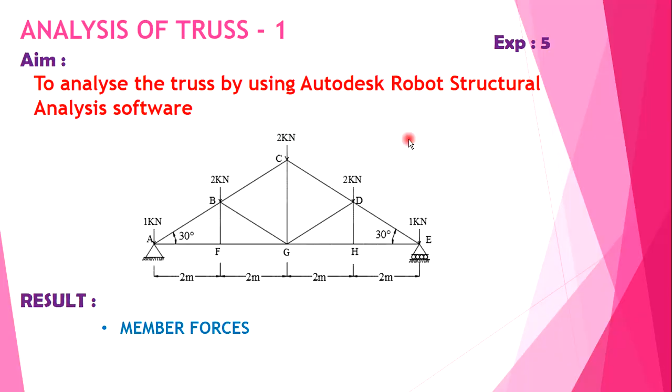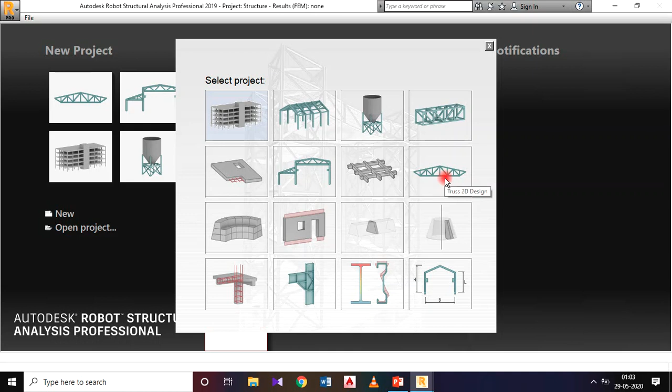We are on the front page of our software. To create a new project, click on New. In this window, previously we discussed the continuous beam and frame, and selected frame 2D design, but now we are going to discuss the truss. For that, select this truss 2D design. Click on this figure.

We got the main page. It is loading. Yeah, we got the page.

Now just verify the units. Go to tools, units and formats. Here the dimension is in meters, section dimension mm, forces kilonewton and moment in kilonewton meter.

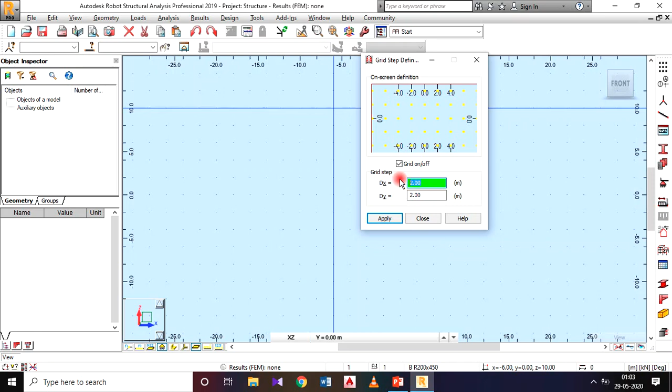Press OK. Then I need to set the ruler for that view - grid, then grid step definition. So I can set it for 1 meter and 1 meter interval. Apply and close, then zoom it.

Then go to view, grid, and turn off these dots. It is not required.

Now I need to define the axis. For that, geometry, axis definition. First we need to see the figure, the truss.

Observe here, in this truss the x values are given as 0, 2, 2, 2 meter and 2 meter. Is it right? But along the z axis it is 0. I need to find this distance, that is FB. I need a reference line here, and also a reference line at this point, that is GC. So 0, and this level, and this level. For that, I need to consider the right angle triangle of this one.

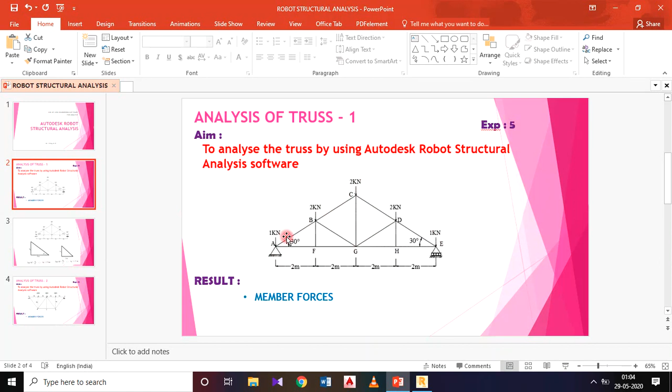I will show this in the next figure slide. I'm sorry, here I need to find this height. So I will take this triangle CGE, and I name CG as H1. The length given is 4 meter and the angle is 30 degrees. This is the bigger right angle triangle. So in this right angle triangle, I have the 30 degrees, and I need to find H1.

So I will apply tan 30 degrees. Tan 30 degrees equals opposite by adjacent. Opposite is H1 and adjacent is 4 meter. I got H1 as 2.31 meter after calculation.

Same thing, I need to find this level also. For this, I will take the smaller triangle DHE. So I have taken H2. H2 is nothing but HD and FB, both are the same, the same level only. So same angle, the 30 degrees. If I consider that, I got H2 as 1.15. So 2.31 and 1.15 - these are the two values. Now I will move on to that screen.

In the X value, it is 0, add, then 2, add, then plus 2 means 4, add, then 6, add, then 8, add. See here: 0, 2, 4, 6, 8. So then 0, 2, 4, 6, 8.

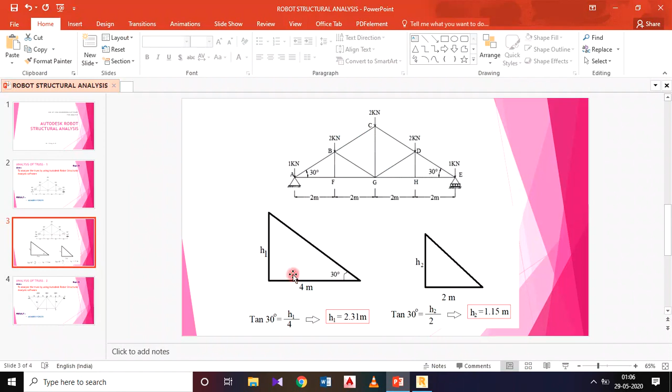The z axis, first will be z, 0, then 2.31 - we have calculated that - add, then another value is 1.15. So the values are 0, 1.15 and 2.31.

After this, apply and close. Yeah, we got the reference axis for that. Now I need to define the property of the member. Now I will move on to the geometry, bars only.

Okay, select these bars. So previously we have taken the bar type as RC beam. Okay, it is a concrete element for the analysis purpose. So here the truss is not made up of concrete, it is made up of steel elements. It may be T section or L section or I section. Okay, so we need to find the member forces in that section.

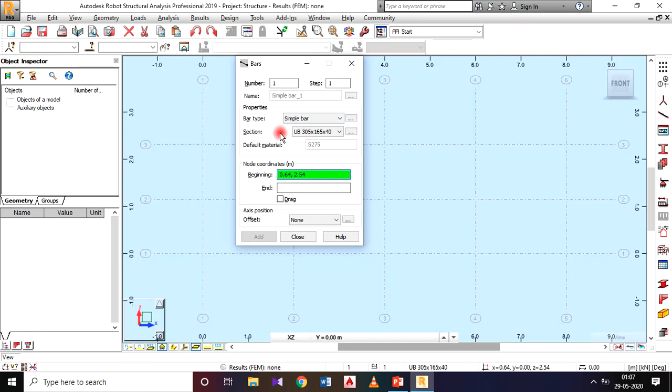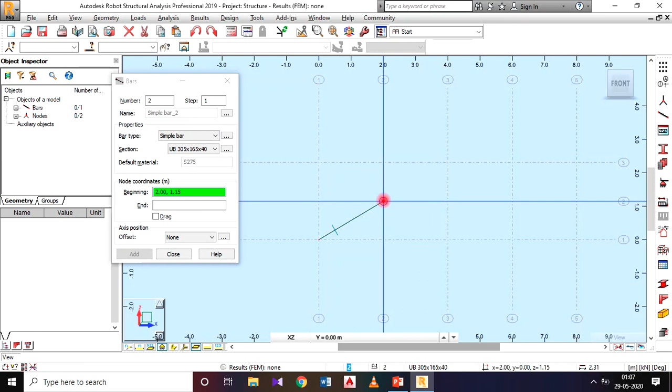So for that, select the bar type as simple bar only by default, and for section it is already given some section, don't worry about that section, just provide the same material for this truss. I start from here, just see this is one reference axis. Okay, start from here. This will be my first point, select from here to here, then here to here, same thing here to here, this point to this point, then same thing, join all the points.

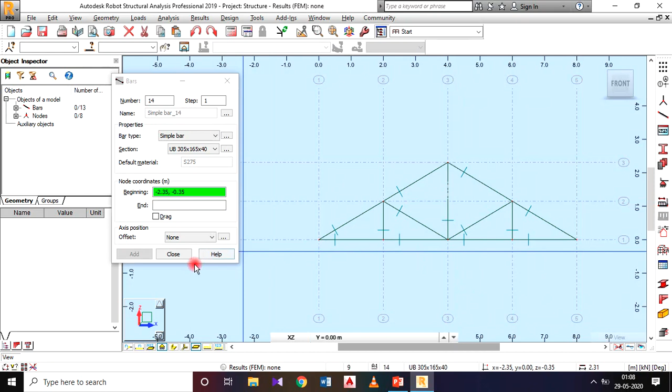Okay, these are the members in my truss. Then we are having a member here also like this, here also, and I have some members. Okay, diagonal members. So here I will provide some diagonal members also. Yeah, after this close, just see this will be my truss having the length like this.

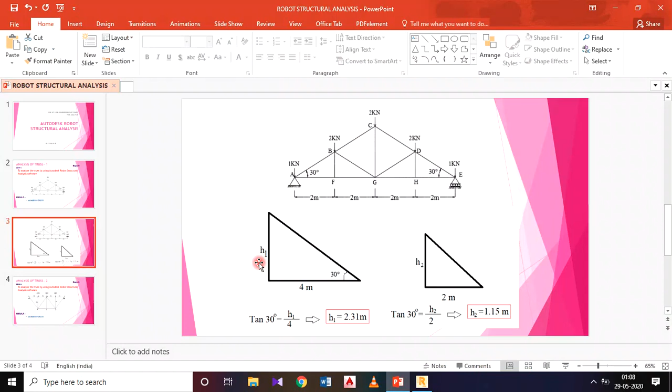Okay, then I need to provide the supports. Here it is hinge and here it is roller. So go for the geometry, then supports, and take the pin. Pin is nothing but hinge, so place it here. Go for the roller, place it here, close it. So we got this. Then I need to apply the loads.

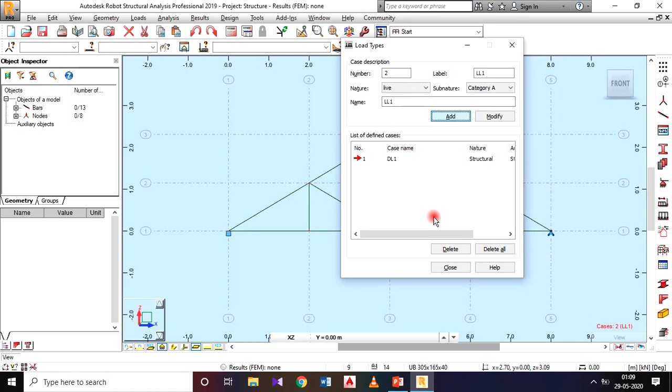For application of the load, go for the loads, then load type. Here we can provide dead load. So for that, by default it is there in the dead, add it. It is added. Then nature, you can change that one to live, add it. Okay, I applied that one also, then close it. Then go for the loads, load definition.

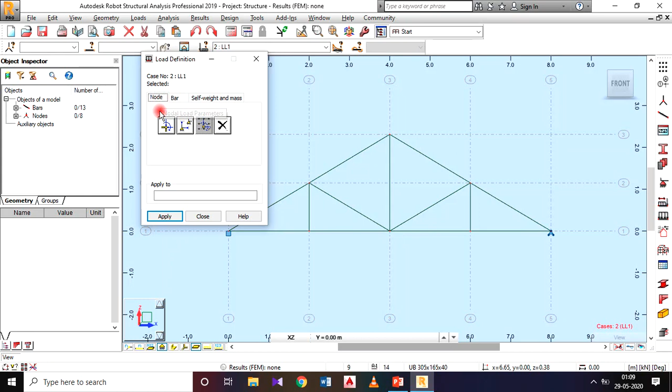Previously we have taken the bar loads because it is a continuous beam and frame, but it is a truss. We need to apply the loads on the joints only. For that, select the node only. Node, in that nodal force, select this one. Here it is subjected to -1, -2, -2, -2, -1. So here it is going downward, in the z direction, vertical, that's why it is a z value, minus because it is going downward, -1, add it.

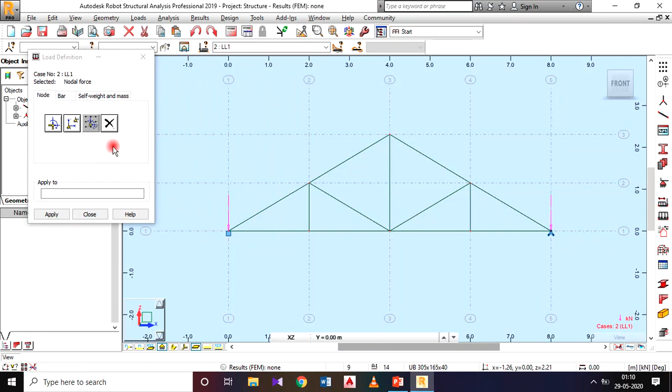So place it at this point and at this point also. Then same on the nodal force. So the value is now -2, add it. So it is acting at this joint, second, third. So these are the points. Apply and close. So to see the loads, right click, display, loads, load symbol, load value, apply and OK.

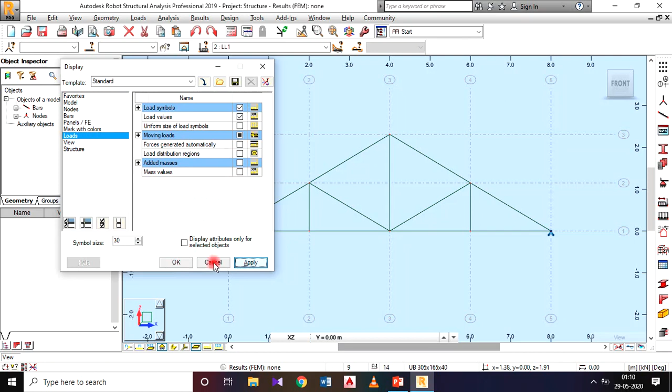Now it is visible. Okay, then I need to analyze the entire truss. Go for the analysis, calculations. So it is analyzing, it is analyzed. To see the results, go for the results. Okay, diagram for bars.

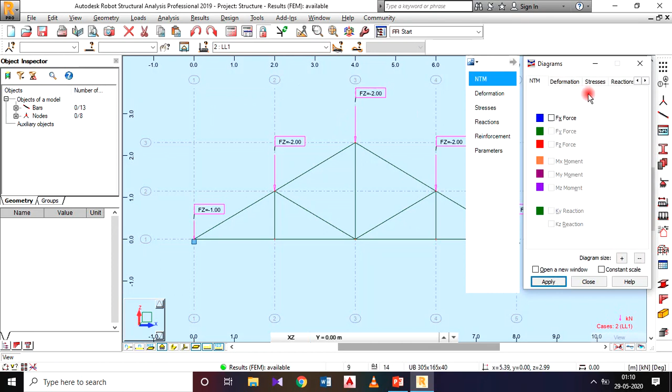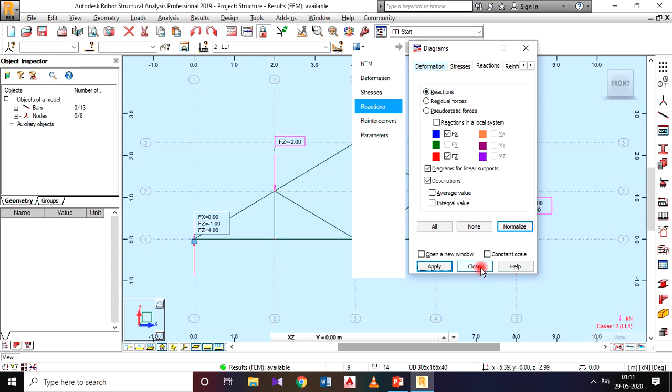In that diagram for bars, I need the reactions, select the reactions, select all, and also, okay, don't select this. It is having supports also, right? So Fx and Fz, diagram for linear support, description also I need, apply. Okay, and close this one. You can drag it down, just see Fx is 0, no horizontal force. Okay, the value of Fz is 4, 4.

Okay, these are the values acting on this. This Fz is -1, this one is a load for this point, and this Fz indicates the reaction. Because it is acting at the same point, that's why it is showing two values. -1 is applied load, -1 is applied load. This 4 and 4 are the reactions of the supports. No horizontal force, no Fx.

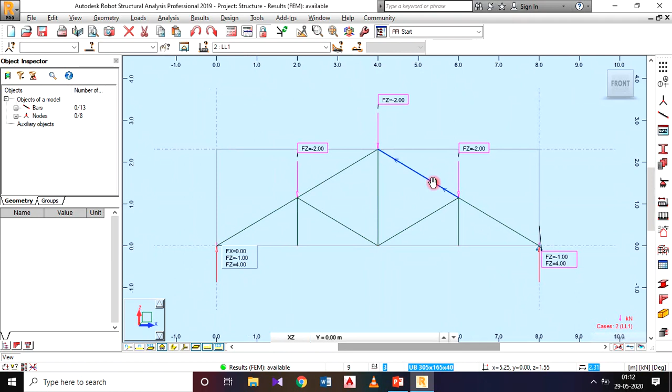Okay, it is 0. Now I need to take the printout and I need to see the picture clearly. For that, go for view, display. You can increase this size to 40 if you want. Apply and OK. Okay, it is now visible clearly. Then file, screen capture.

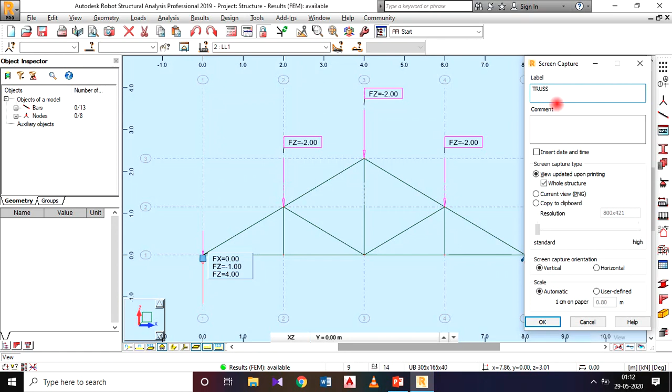Then name it as truss 1. Okay. Then finally I got the reactions. Then the final result is the member forces. Go for the results, diagram for bars.

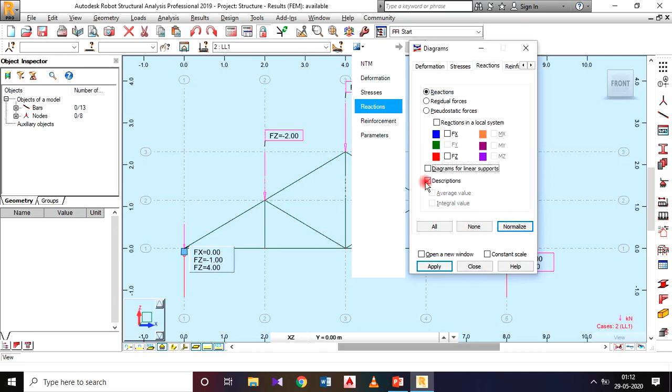First remove these reactions. Okay, select these reactions, select none. I don't want the deformation diagram for bars. Apply and close. And I don't want the loads also. I don't want this load also. So go for right click on the main screen, display, then loads, and select these load symbols and load value. Apply and OK. It is removed.

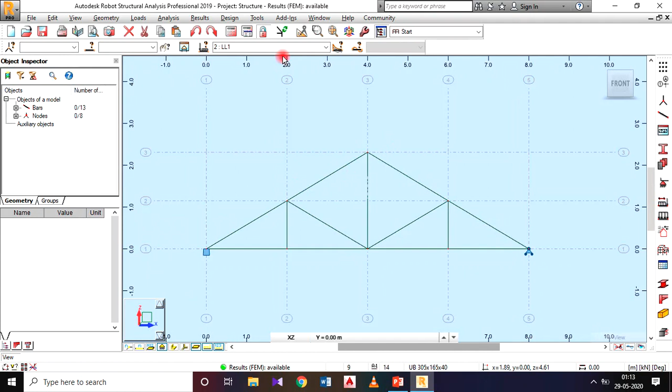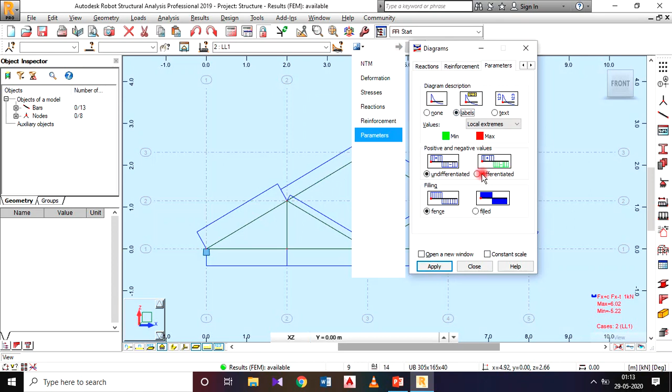I need the member forces. To see the member forces, go for the loads, sorry, results, diagram for bars. Then in the NTM, Fx force, this indicates the member forces. Okay, so apply it, but the values are not visible. So in these parameters, select label, differentiated, fixed, fill, and also the values, all values I need. Apply. Yeah, so we can see the things. Okay, and close. Apply and close.

Yeah, here we can see the truss with the member forces. This one is having 6 kilonewton force. Here it is 4, 6, and here it is this member and this member. These vertical members are not having forces. They are 0 members. This member and this member, and it is differentiating the positive and negative values. Okay, positive value is in blue color, and the negative value is in some other color, yellow color, right?

So this indicates these blue members are subjected to compression. The positive value indicates compression and the negative value indicates tension. These yellow color members are subjected to tensile forces, and these blue color members are subjected to compression. Okay, positive is nothing but compression and negative is nothing but tension. So here the decrease in the length, here increase in the length.

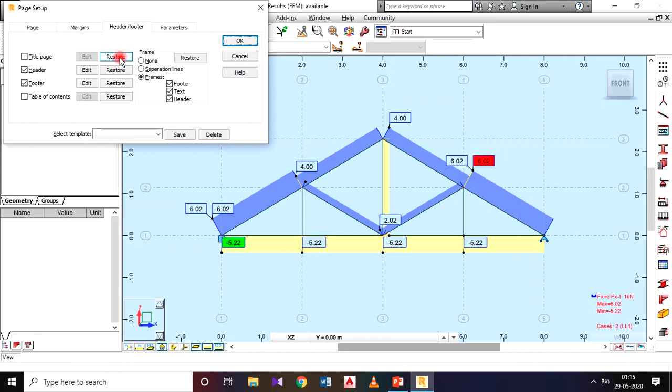Okay, to take the snap of this one, go for file, screen capture. You can name it as member forces. After this, press OK. Then file, page setup, header and footer, header, in that edit. You can name this one as truss 1. Then close this, yes. Then press OK.

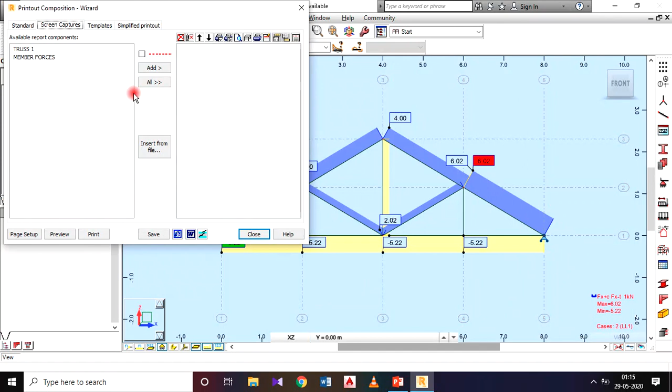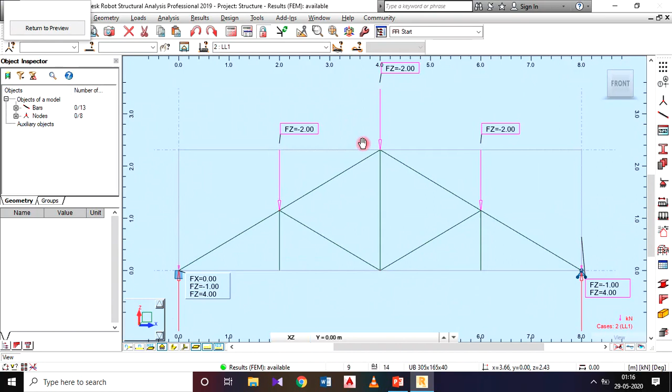Then file, then printout composition. So I need these two figures. Then go for the preview. We got the preview of this one in a single page. So to edit that one, go for edit. So I got the symbol, click on this screen. So here I'm zooming it and placing it in the middle. Return to preview. Same thing for this member forces. Zoom it, return to preview. Or if you want to change the color, you can change it, okay, in that setting only.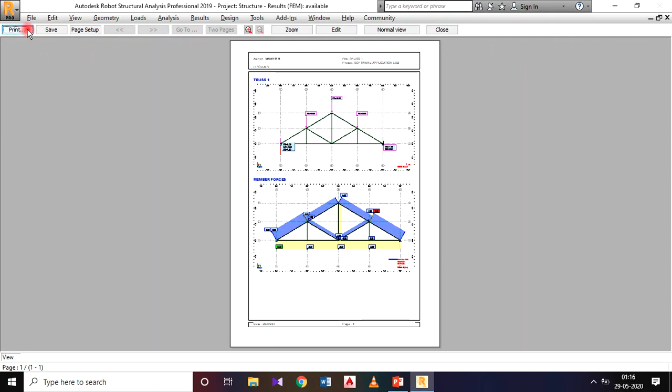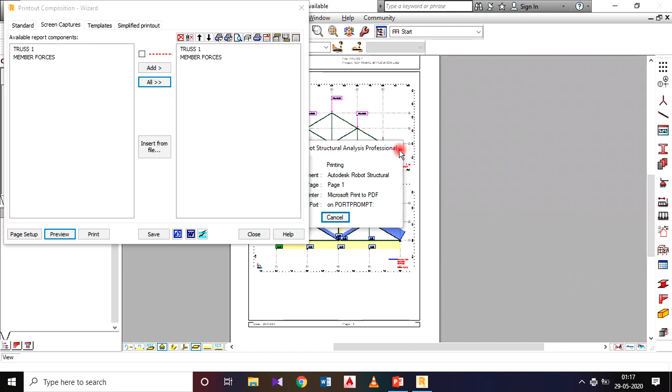Now I will move on to the print. Then print to PDF. Yes, okay. I will save this one on the desktop only, and I name it as Truss 1. Truss 1, save. It is saving the single page. Then I will close this one, and I will save this file also. So I save it in the experiment folder as Truss 1. Okay, save.

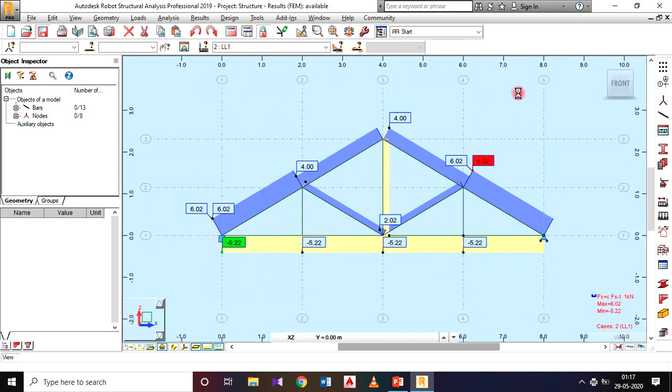Okay, it is saving the file. After this, minimize this window also. Okay, it is here on the desktop, Truss 1. If I double click on that, you can see the results. So you can see the member forces also. Positive is nothing but compression, negative is nothing but tension, and no figure here is 0. You just see 0 members. These two vertical members are 0 members. They are not subjected to compression or tension, but this is compression and this one is tension.